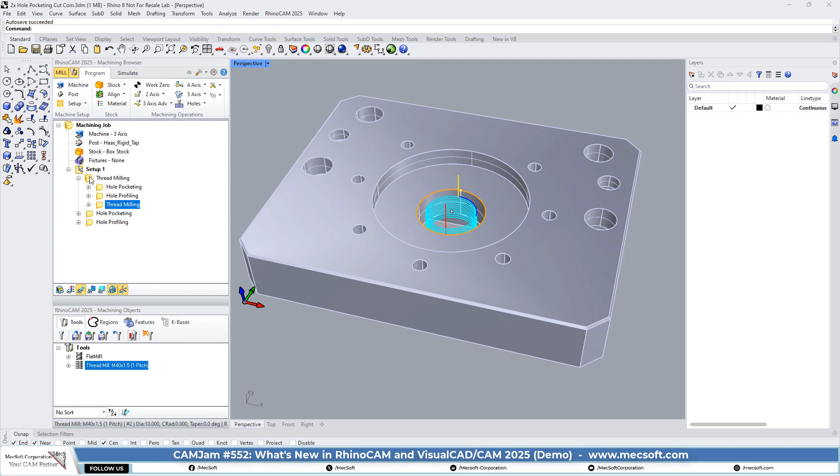So we've got a prismatic two-axis part. It's got a bunch of holes. One of the things we're going to show here is the enhancements in both the hole pocketing and the thread milling. In this part, we have an M40 metric thread that goes through the base of this part. Prior to starting that operation, we want to clear out and rough out the material, and get the inside diameter of that thread machined. So we need to do that ahead of time before we can do the thread milling.

So let's go look at hole pocketing. The first thing we're going to do is pocket out the hole and leave some allowance for the thread. So let's take a look at hole pocketing.

What we're going to do here is not select the whole perimeter, because that doesn't represent the exact inner diameter of the thread itself. So we're going to select a point, right in the center. So we'll go on to the tool, and we're just going to use a flat mill, 12 millimeter diameter, to hole pocket this out.

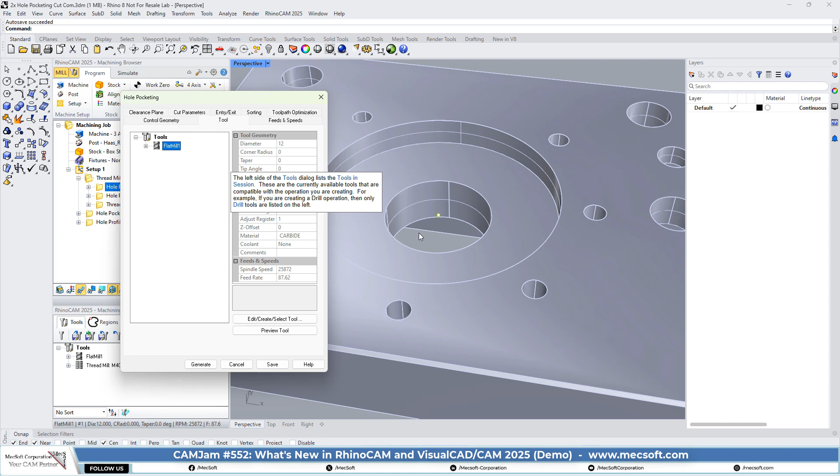For the cut parameters on the hole pocketing, the enhancement in version 2025 that we mentioned is compensation. So now you can apply cutter compensation, right or left, on hole pocketing. We've got compensation set to auto on, and we've got other cut parameters set.

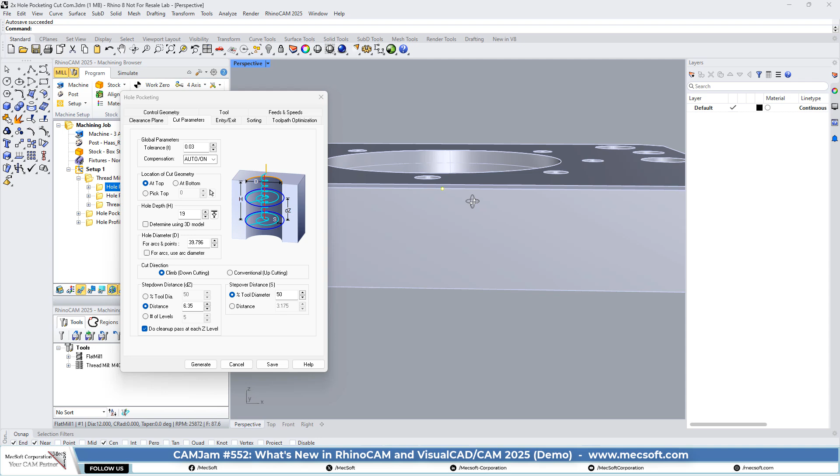A few things of note here: make sure you select the location of your cut geometry. In this case, we have selected a point, and that point lies at the top of the hole. It's not at the top of the part, as you can see, but it's at the top of the hole, and that is set to 'at top'.

We also have a hole depth that we calculated using the measuring tool, and we have a hole diameter. Here's where I mentioned that we didn't want to use the diameter of the hole as modeled, because we want to make sure we're cutting to the minor diameter of the thread, which will be smaller in diameter than the hole itself. So we calculated that it needed to be 39.796 in diameter - that's the minor diameter of the M40 metric thread we'll be thread milling in that hole.

One thing to note: you want to make sure you're using a point so you can specify the diameter. If you check this to use arcs for diameter instead, it'll just cut to the diameter of the hole itself, and that's not what we want.

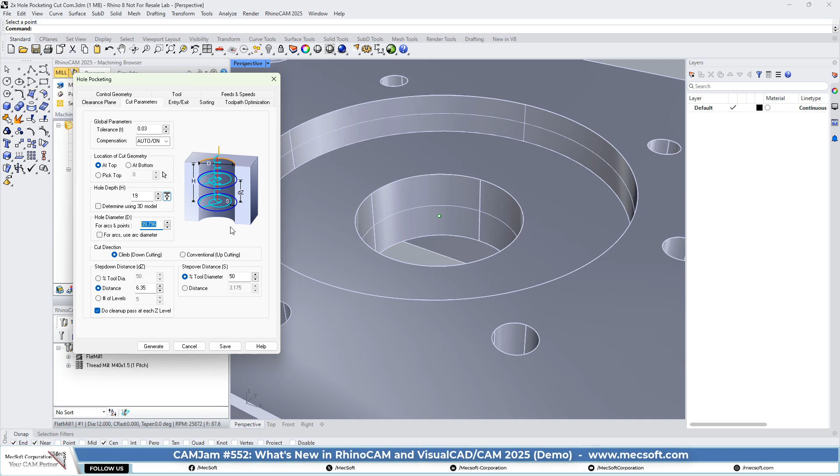So what else do we have on here? Everything is pretty straightforward. We're adding a cleanup pass at each Z level just to make sure we get as much accuracy as we can out of the hole pocketing. Now the diameter of the hole pocket is not going to be the finished diameter - we're going to come back with a hole profile. So we can go ahead and check that. It could be unchecked, but we'll leave it checked.

Entry and exit: typical for hole pocketing, we have a helical entry, so we get one helical entry at each cut level. It's going to helical down and do a cleanup pass at each level. We have a helix diameter of a quarter of an inch, or 6.35, and then a height H of 6.35.

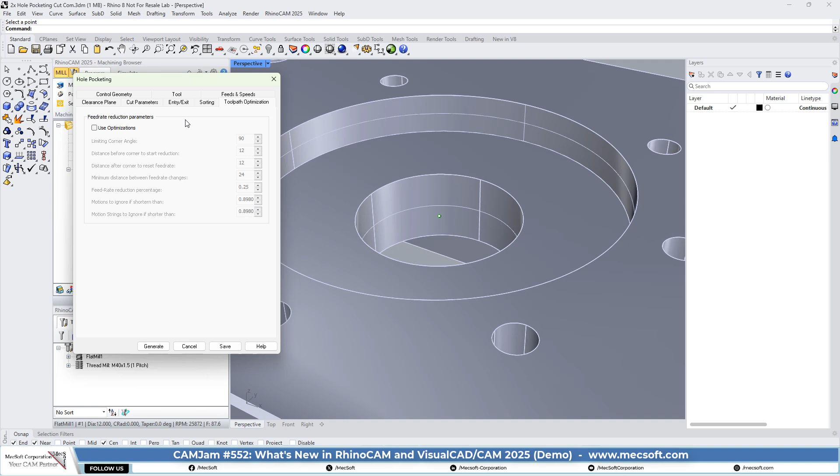Sorting - we're not going to do any sorting, since we're only cutting one hole. And also in 2025 we have feed rate optimization parameters, but we're not going to use those in this case. So let's just generate that.

So we have a hole pocket - one helical motion, and then a cleanup pass at each cut level. If you look at it from the front, you'll see we have a helical entry and then a cleanup pass. The blue motion is a cleanup pass at each cut level, and there are going to be three cut levels.

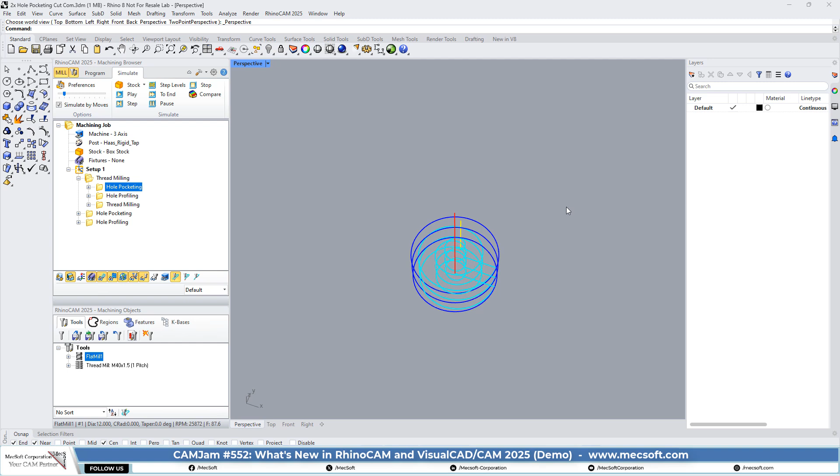So that is the hole pocket - basically a roughing operation for this M40 metric thread inside diameter. Based on that, let's go ahead and simulate it. Since we're here, let's turn the stock off. Now, since we haven't done any other roughing, you'll see this hole stick up a little bit higher. Let's go ahead and play that.

Okay, so we got the hole pocketing. Let's go ahead and look at the profiling.

In hole profiling, you have one helical motion to the full depth of the hole, and then a cleanup pass at the base of the hole. This cleanup pass is what really zeroes in the accuracy of the hole. Let's take a look at that.

We're using the same point, the same tool. In the cut parameters, we have compensation on again, and location of cut geometry similar to the pocket at top. The hole depth is the same at 19 millimeters.

And then also for the hole diameter, we're using 39.796. That is the minor diameter of the hole. And we're going to uncheck use arcs, and everything else looks okay.

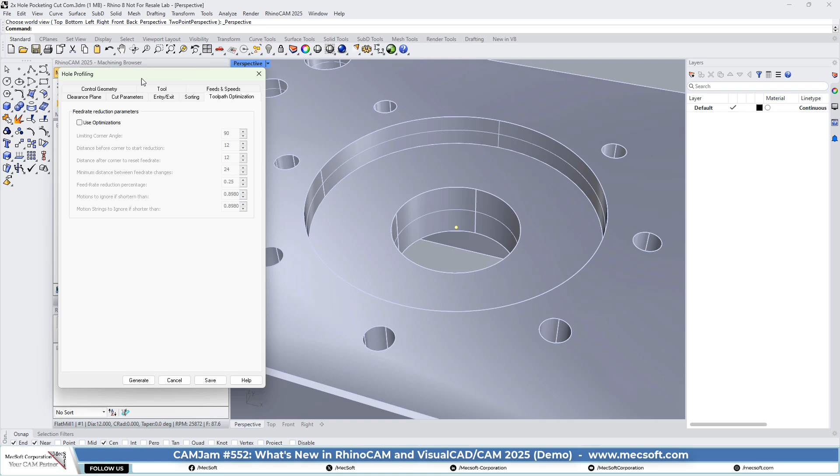Entry exit, we got lines and arcs, so we got a 1 millimeter entry, linear entry, and then also linear engagement, a linear retract. That all looks good. No sorting, no optimization. Let's go ahead and generate that.

So here is our hole profile, if you look at it here. This is the minor diameter of the thread, so keep that in mind. We're not cutting all the way to the hole.

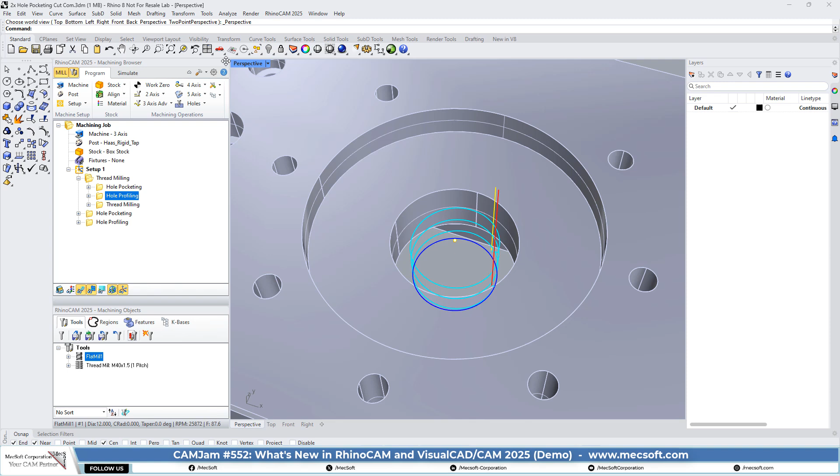Let's go ahead and show you what that looks like. If you look at this, this is the M40 hole here on each side, and this is the helical motion of the hole profiling operation. Then we have a cleanup pass, circular cleanup pass at the bottom. And again, we have cutter compensation enabled.

So now we've got this set up. Let's go up here to isometric view. Let's change this view. Okay, so now we have the hole prepared and it's ready for thread milling. Let's go into the thread milling operation.

So again, we're not going to use the point for the thread milling operation. We're going to use the circular diameter, because we're going to specify the parameters for the thread in the dialog. So this circular diameter is just more of a locator.

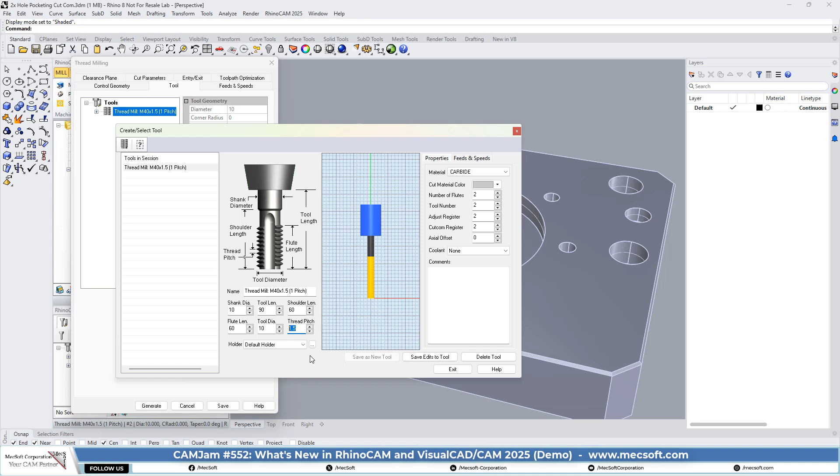So we're going to pick the tool, and as you can see, we have a tap tool. Let's take a look at that, or a thread tool. We have a thread mill tool, and what's critical here is the 1.5 millimeter pitch. This is the distance between thread to thread for the M40 metric internal thread diameter on this part.

So these other dimensions are not that critical, but obviously they've got to be smaller than 40 millimeters. You're using a single point tap tool, so this tool will only have one thread on it. It's not going to be threaded all the way down, so we'll just have one thread. The distance from the beginning to the end of that thread is the pitch of 1.5.

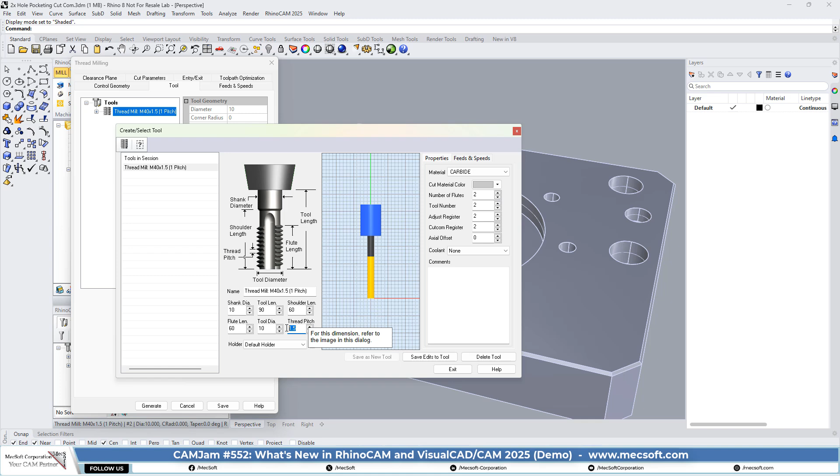So that's the major parameters that you need to make sure you got down correctly. The thread pitch is critical, so that has to be correct. Let's exit out of that. So we have our single thread tap tool specified.

Let's look at the cut parameters for thread milling. As I mentioned, the hole itself is just a locator because we're going to specify the diameters here. So we're doing an internal thread. It's going to be an M40 internal thread. We've got compensation on, cutter compensation turned on.

It's available in thread milling as well. So we've got a right-hand thread and an internal thread. The major minor, since we're doing an internal thread, it will be the minor diameter of the thread itself, and that's set to 39.796. And then a total thread length.

This is set to 18 millimeters, but I think that needs to be 19. Set that to 19. The start depth, this means where in this depth you want to start cutting the thread. We want the thread to go all the way through from top to bottom, so the start depth is set to 0.

And for the pitch control, we're setting it to a pitch at 1.5 millimeters. That is critical. That has to match the tap tool that you're using. And in 2025, we added some additional parameters. You can specify the pitch by threads per inch if you want to use that value.

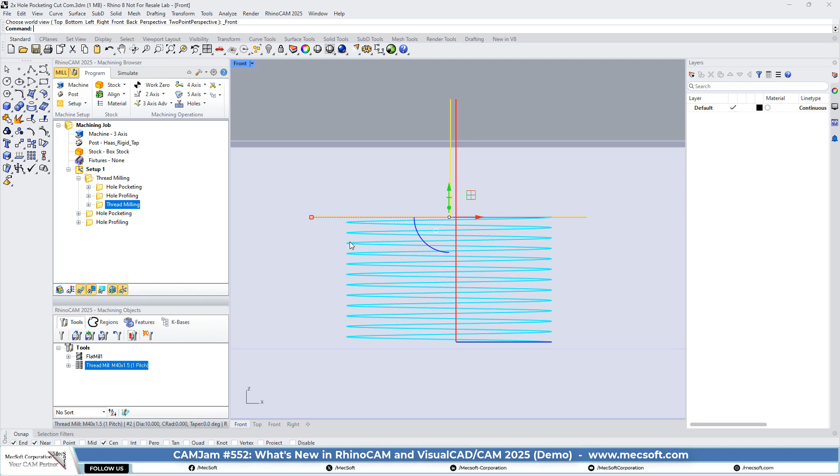As you can see, you don't actually see the thread—we don't simulate the actual shape of the thread, but the control geometry is there to create it. It's one helical motion at the thread diameter, with a helical ramp entry to the start of the thread, cutting at a pitch of 1.5 millimeters from top to bottom. So let's take a look at what this looks like when we post it out.

Let's go ahead and look at the post for a moment. Okay, let's see what else we got. We got a couple of posts here—Haas CutCom, let's go ahead and select that, and we'll pick OK.

When you run this on the machine, this big hole here at the top is all going to be cut out already, so we're just looking at the operations needed to do the hole pocketing and the thread milling. So let's do the hole pocket. Let's go ahead and post that.

So what we got here is the hole pocket, and we have a G40, which is turning off the cutter comp. Then we got a G41, which turns on the cutter comp for that dimension, and that continues on down for the entire pocket. It should turn it off at the bottom. So we got cutter comp in the hole pocketing.

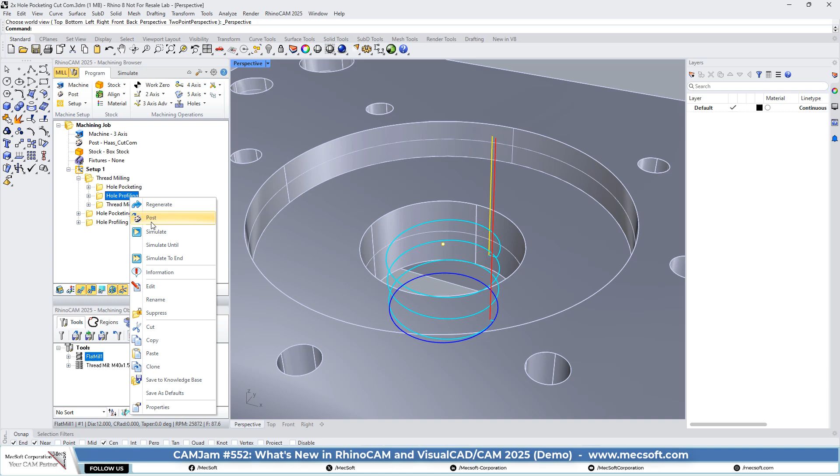Let's go ahead and look at the hole profile. Post that. Okay, very similar—we've got a G40 to turn off cutter compensation at the start, and then we're doing a G41, turning on the cutter comp for the perimeter diameter of this hole.

This blue motion here at the bottom, that's the full cleanup pass. That's going to be assigned to the G41 where you can offset it at the controller.

Now, just a note about cutter compensation. If you're not familiar with what it does, there are some misconceptions out there that it's only for compensating for tool wear. Yes, you can compensate for tool wear, but that's only going to come into play if you're doing production parts. If you're running 100 parts an hour, you're obviously going to have a lot of tool wear, and every time you do your dimensional check, say every 50 or 100 parts, you can make those adjustments on the controller using the cutter compensation offsets for each of the tools. That's one of the ways it's used in production.

But in most cases, our users are not running production—well, they do in some cases, but a lot don't. So what would you use cutter compensation for if you're not running production? Well, think of it this way: any operation you cut, you're going to have a setup, you're going to have stock, and you're going to have a tool, and you're going to run it. The very first time you run it, it may not be exactly positioned correctly, depending on the geometry, depending on the cut, what you're doing.

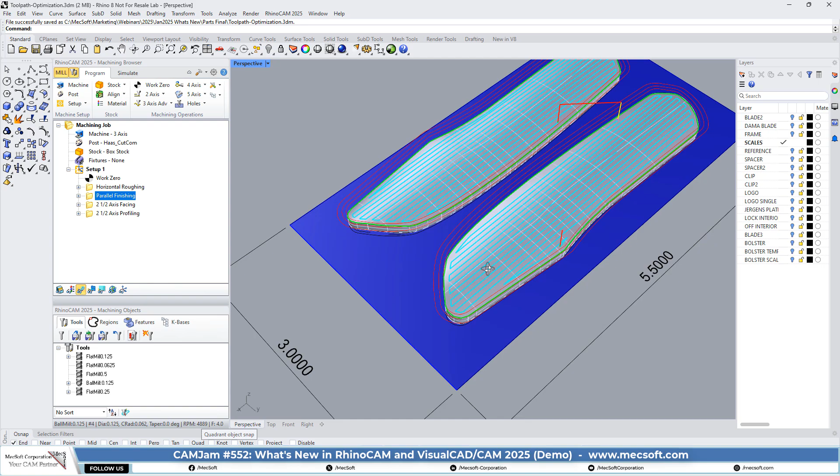By leveling, I mean not just 2 1/2 axis facing, pocketing, profiling, etc., but also in horizontal roughing, where you have flat cut levels, and any other operation type that creates a flat planar area. Okay, so in this particular part, we have a couple of parts and they sit on top of a plane that we're going to use to machine them.

So let's look at what we have here. We have horizontal roughing. Let's take a look at that. Okay, we got no control geometry selected, so it's just calculating what it can remove. We got a quarter-inch flat mill, cut parameters. These are all straightforward. You'll be familiar with all of these. Let's go ahead and look at the cut levels. So here, pretty much standard.

We have an extra button here called Add Stock. I'm going to go over that in another part in just a moment. And then also engage and retract. We're using a helical engagement. We're doing some arc fitting.

Toolpath optimization. So here, if you're familiar with our feed rate optimization in version 2024 and prior, you may know that feed rate optimization was an edit that we did after the fact. So you could only do it in a toolpath. Let's save this. I'll show you. You could only do it in the toolpath editor, okay?

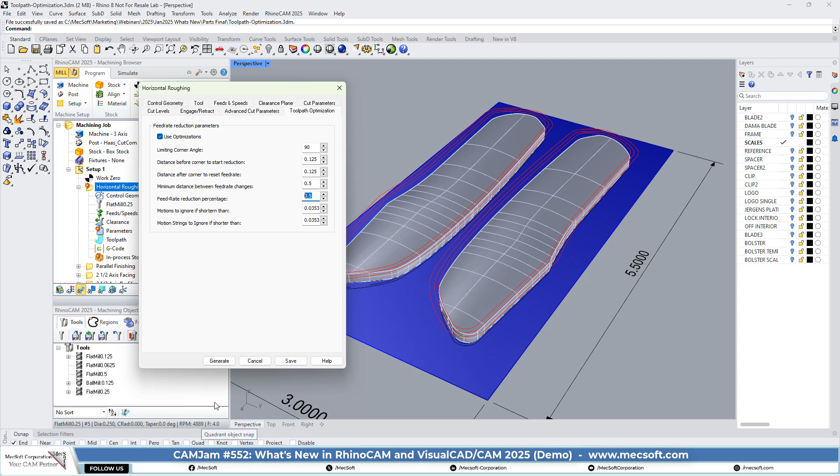So let's go ahead and regenerate this, okay? And let's go ahead and look at what the feed rates are. So we have a cut feed rate of 4 inches per minute.

Now, in version 2024, that would be the cut feed rate throughout the whole path. It would not change. Come to a corner, your router will have to come to a complete stop and then start and stop, start and stop, and you actually can see that jerking motion on your router if you have a lot of sharp angles in your toolpath. Now we have other things you can do, such as some looping and stuff like that, which helps also. But now you can actually control the feed rates at those corners.

So toolpath optimization, it's enabled, okay? And the feed rate is set to 4 inches per minute. Okay, so let's generate that. Let's see what our post is set to. Our post is set to Haas CutCom. I think that should be all right. Let's go ahead and pick OK there, and let's post this and see what we got.

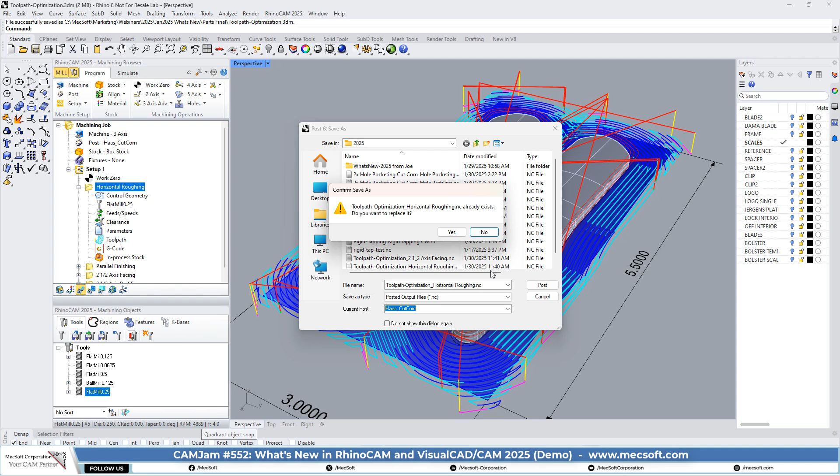Okay, so let's look at this. So our feed rate optimization was enabled. The feed rate was 4 inches per minute. At the corners, we have a lot of corners, so at the corners, it should drop by 50%. So what you're seeing here is we got a feed rate of 4. It's dropping to 2, 50%. All the way through here, it's dropping 50% at corners. Anytime where you see an F2 is where it's dropped from an F4 to an F2. So this is feed rate optimization in action, and how it looks in your G code itself.

If you don't see the reduced feed rate in your posted G code, you need to make sure that you have it enabled in the operation dialog, which is called toolpath optimization. Make sure that is enabled, and make sure you have the parameters set the way you want them to be set. Okay, let's cancel out of that. Let's see what else we have up here. So that was horizontal roughing.

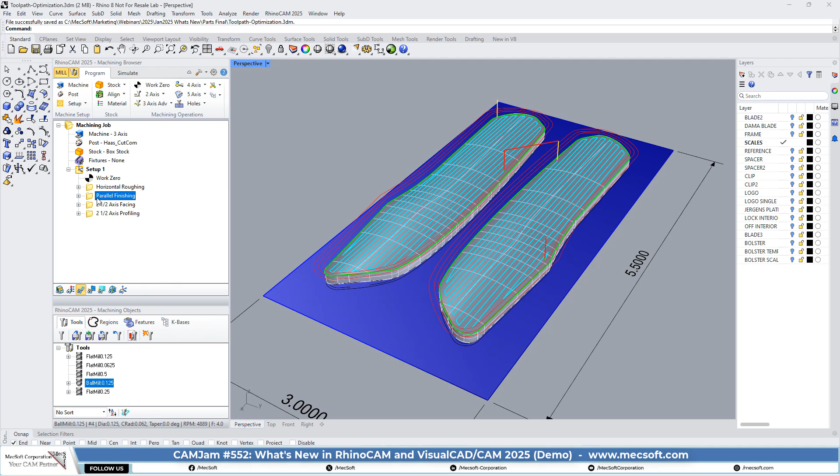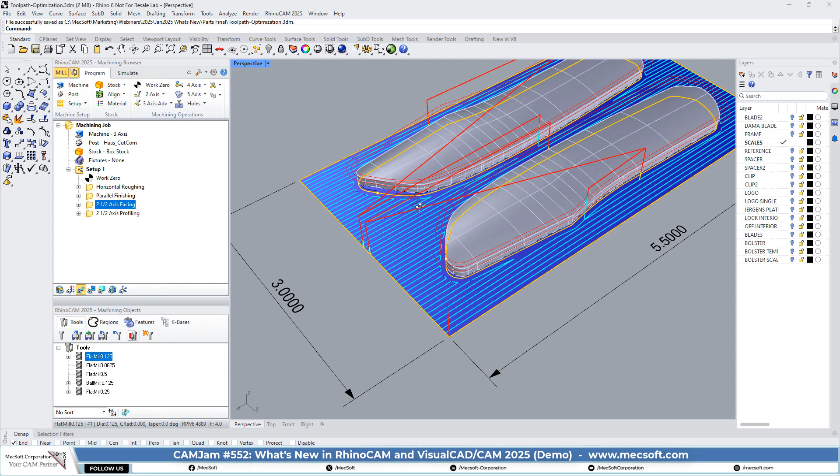It also will not apply to horizontal finishing that's not planar. So we have a contoured parallel finishing. It will not apply to that situation. But if we go on down to the facing, this is a planar toolpath with a lot of sharp corners that will apply there. So let's take a look at the facing.

So we have use optimizations enabled, and we have the feed rate reduction percentage set to 25%. Let's take a look at what we have for feed rate. So we have the cut feed rate at 10. So this is 10 inches per minute. At the corners, it should drop to 2.5 inches per minute. It should be 1/8 of an inch prior and 1/8 of an inch after each corner. Okay, so let's generate that again. Let's post that.

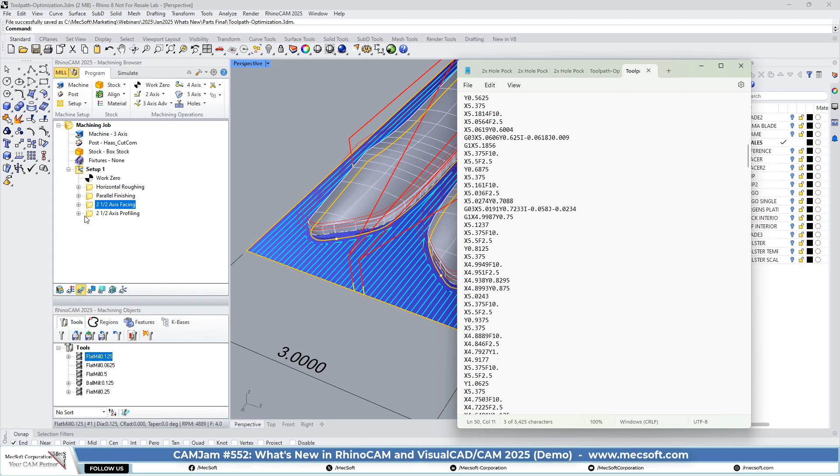So here you'll see that we have a feed rate of 10, and at every corner it's dropping to 2.5. So all throughout the whole part, you'll see it drop to 2.5 at each corner. At the beginning, it'll drop, and then after it turns the corner, it will speed up to 100%. So that's feed rate optimization in action in 2 1/2 axis facing. Let's go ahead and minimize that. Let's take a look at the profiling.

So your feed rate optimization, well, we do have it in there. You can apply it to profiling as well. Okay, so that is 3-axis feed rate optimization. Let's take a look at our next 3-axis part, which is, let's take a look at this one here, which is faceting controls.

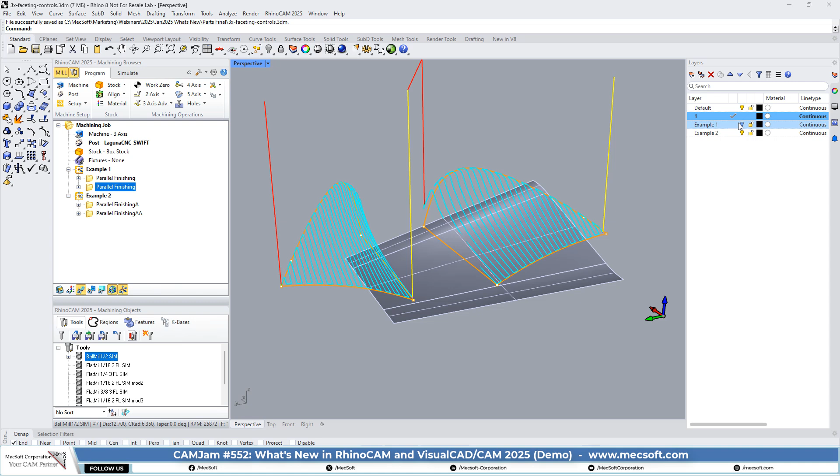Now, you may have noticed, and this is only in certain surface cases, such as ruled surfaces. Let's turn our surfaces on. We got 2 examples here. Let's turn that off. Okay, so the problem applies when you have a ruled surface. A ruled surface is one that is a direct connection between one curve and another curve. So it's like a ruler. It's like you put a ruler on each of those curves, and you just run the ruler down as it stays on both curves, all the way to the end.

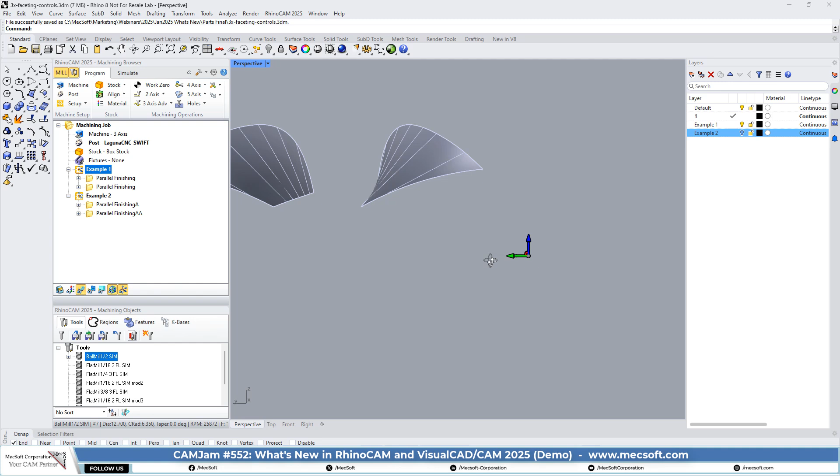So as you can see, any cross section in this surface is a straight line, but it's a twisted ruled surface, which is a very complex surface. And in some cases, the actual internal generation of the coordinates and the facet points on that surface can get skewed. This is a problem that we've been working on and fixed in version 2025, and a lot of users out there, if you're one of them, you'll be very glad to see this. So how do you implement this? If you go to the CAM Preferences dialog, go to the Machining tab, you'll see Meshing Parameters, okay?

So what it's doing is it's using these parameters here internally to calculate each control point on the surface that we're going to use to actually generate the tool path. So our part is in millimeters. We have an aspect ratio, which is the relation between the length and the width of each facet in a mesh. If you're familiar with mesh geometry, you know that a mesh is a collection of planar triangles that define the entire object.

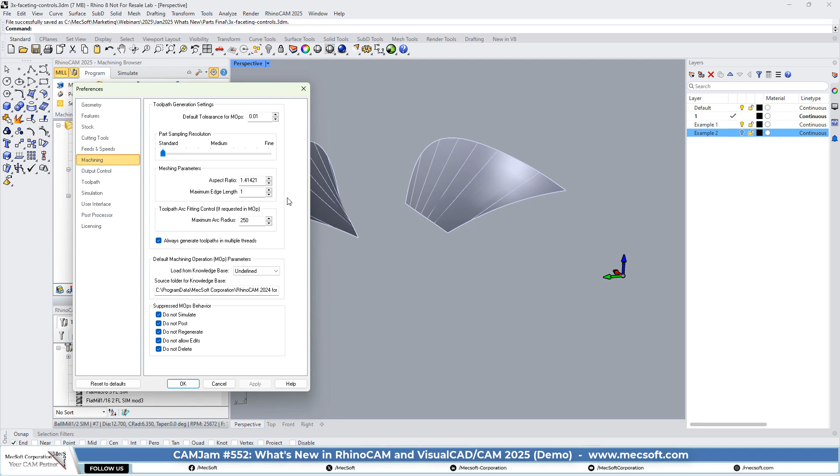So we're setting the aspect ratio to 1.41. That's the relationship: length divided by width is the ratio. And then we're also setting the maximum edge length. In this case, we're setting it to 1 millimeter. So let's go pick OK there.

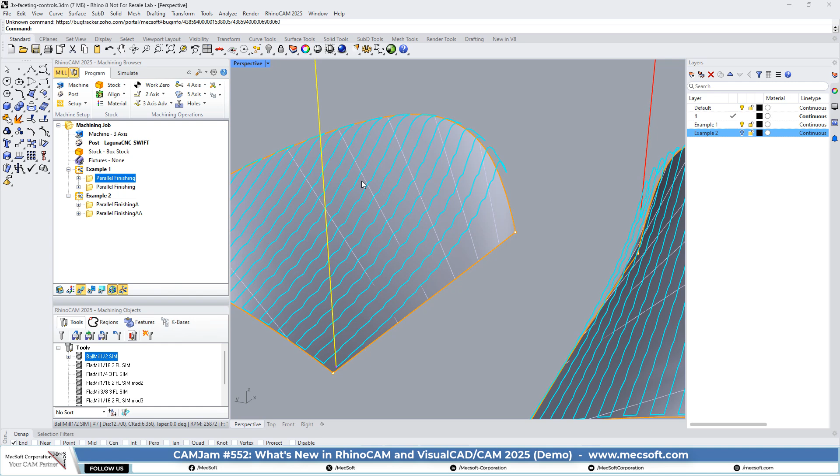So if we look at the parallel finishing before we set the meshing parameters, you'll see that there's a lot of jagged lines in that tool path as that tool rides over that ruled surface. This is bad, so you're not going to want to cut it like that. So what we've done is we've implemented the meshing parameters; once you set those and you just go back in and regenerate the operation, you'll see that it's cleaned up for you.

Nothing else you need to do. You don't need to create a mesh in Rhino or in Visual CAD. You don't need to create a mesh to try to fix those errors in the toolpath. That's all fixed in version 2025. And we have another example.

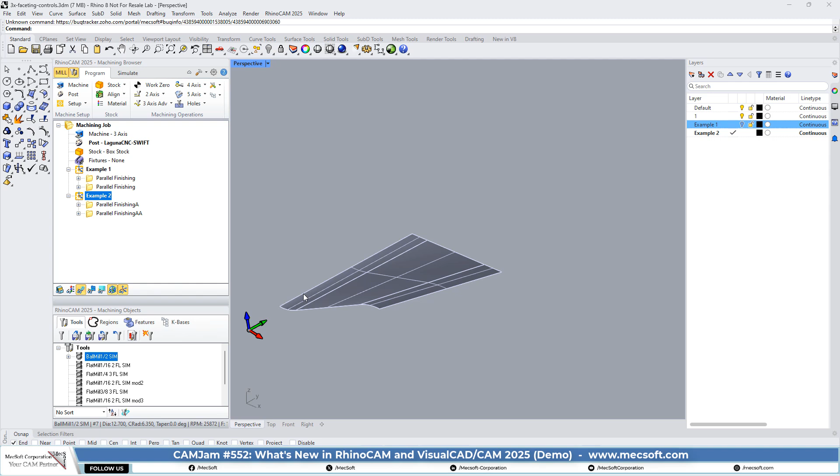So here is a ruled surface. It's not as extreme as the other one, but it is relatively complex. We don't have a straight line here. We have a curve on this end with a straight line on this end, which causes the ruled surface to twist around. So let's take a look and see if we can see the problem.

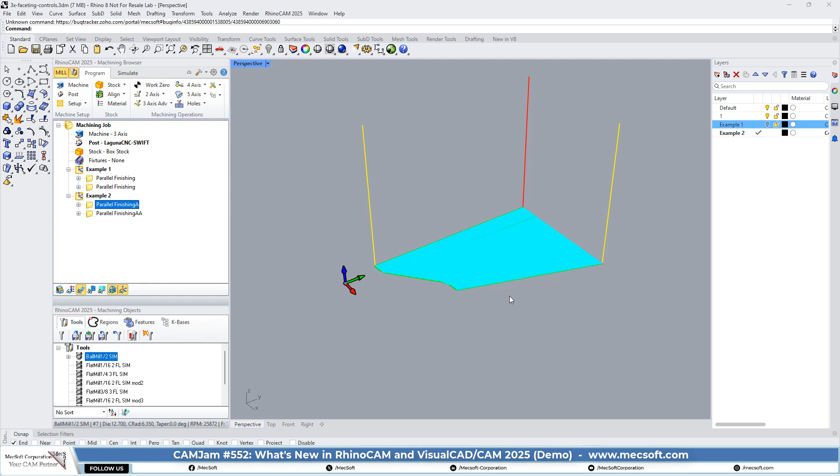So here's our toolpath. In order to see this, sometimes you need to have a really dense step over in order to see the phenomenon we're looking at. So you can start to see it. Let's go into the Simulate tab. Okay, so the part is turned off.

So what you're seeing here, you're seeing those facets. That's a good way to get it right there. You see those rectangular areas in the part or in the toolpath itself? So that will be seen when you machine this on the router.

So now if you set the meshing parameters here, again, you set it over here, machining, meshing parameters, and we generate the toolpath. We added a second toolpath. You'll see that those faceting phenomena are gone, so you will not see those in the machined surface. Very, very sought after fix, enhancement, whatever you want to call it. This should not happen now in version 2025.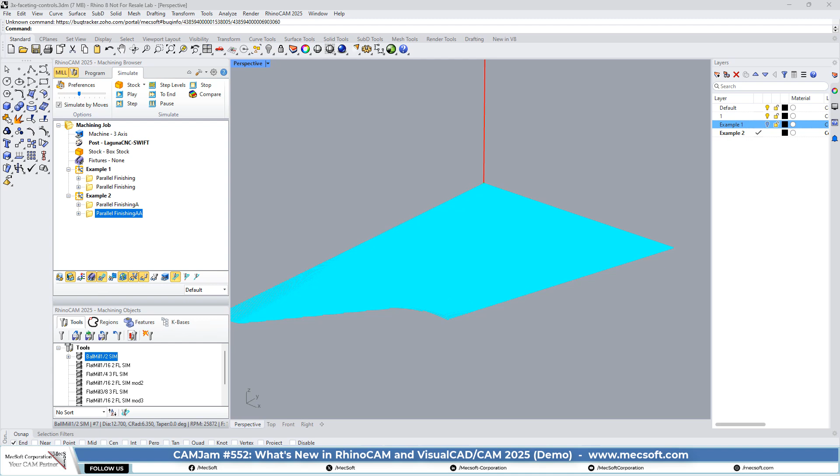Okay, let's keep going to some additional 3-axis enhancements. Let's get my cursor back here. We're going to look at this one here. Now in 3-axis operations, for your control geometry, you can combine both surfaces and curves, and they act in a nesting type relationship.

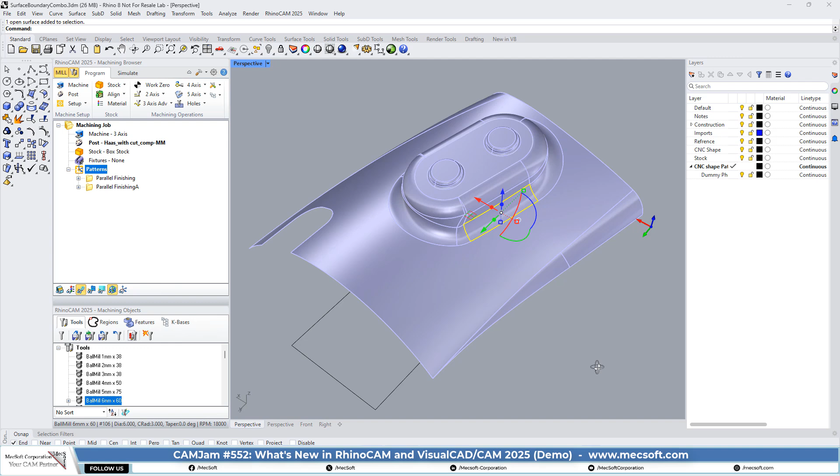So in this particular example, we have a surface. This is our base surface. And then we have a feature on top of that surface that rolls up off of that surface. Now, to cut this, you may not want to cut this feature as part of the surface. You may want to just do the surface first. So in cases like this, you can now select both the surfaces and the curves in order to get a nested effect.

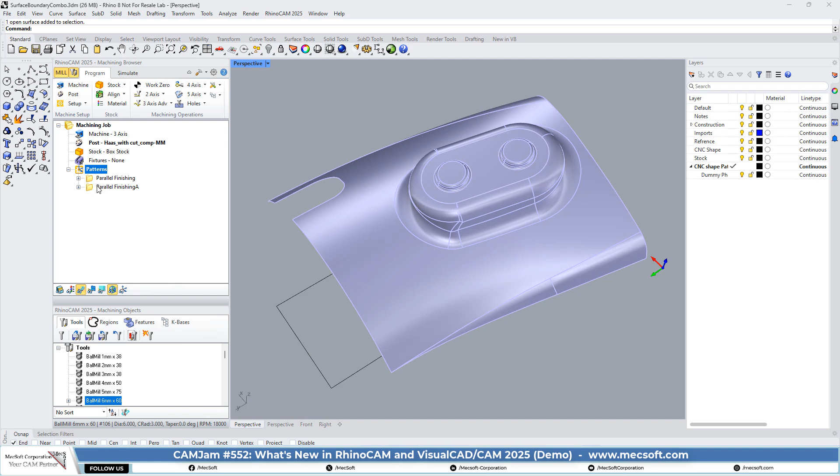So let's look at the parallel finishing operation. In this particular example, we have a part surface selected on the surfaces, part surfaces tab. So this is the green edges here. That's our base surface. And then for containment regions, we're selecting these perimeter curves all the way around the base of this feature.

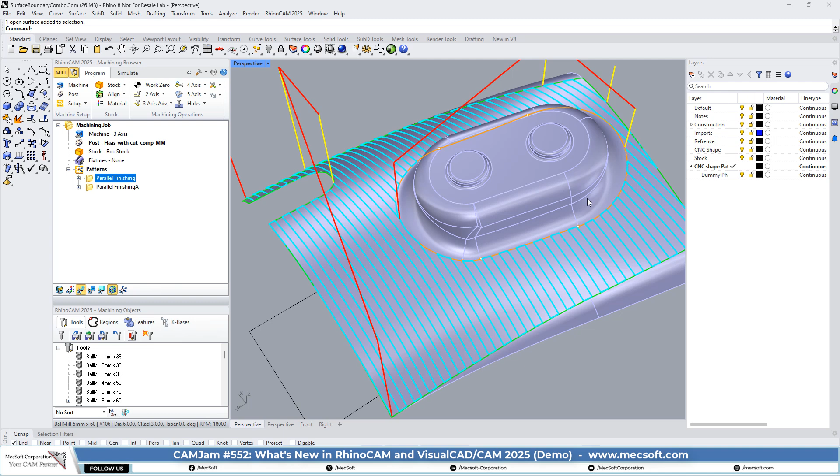So what happens now when you generate that, the inner curves will serve as a void region. So the tool will not violate these inner curves. I know you may be wondering, well, these curves are completely inside the surface. What happens if they don't? What happens if they fall off of the surface? So we'll get another example here.

If you look at the top view, and let's go into a wireframe for now. So we've got the surface and we've got a planar rectangle here that is partly on and partly off the surface. Let's take a look at how that looks here.

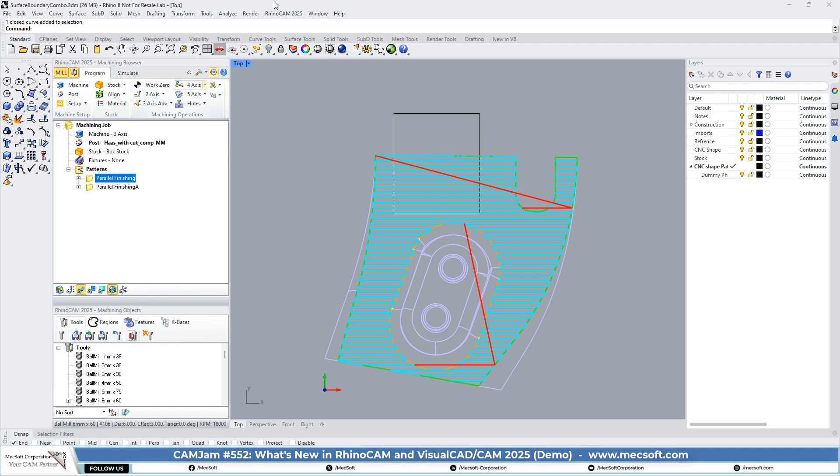Let's turn the surfaces back on. Okay, let's just take a look at it. As you can see, it creates a void region where the curve geometry intersects with the surface geometry. It treats that as a void region.

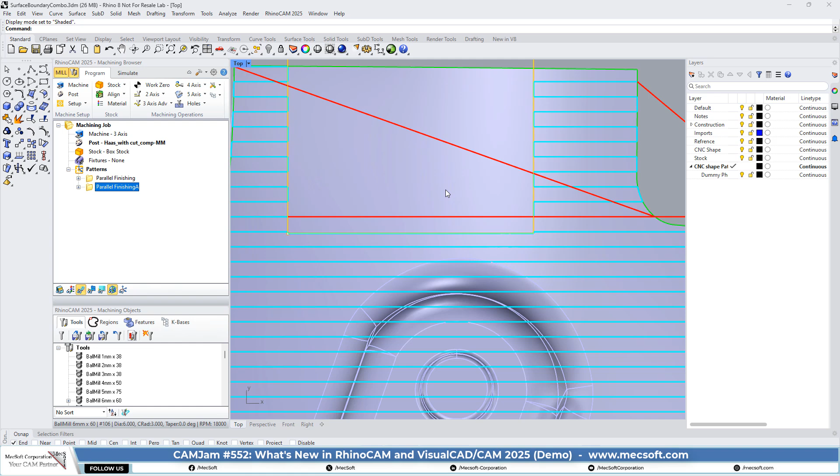Okay, so think of it as having void regions in 3-axis, where prior versions of void regions basically applied to 2-axis, but you could do it in 3-axis if you selected the curves in a certain way, like edge curves of the surface and edge curves in here. It will figure out that some of these curves are inside the other curves, but it's more of a complex situation. You could run into some conditions where it could be a problem, okay?

So now you can use both surfaces and curves together to generate your toolpath in 3-axis methods. And in a lot of these 3-axis methods you will see that you can put both containment regions and part surfaces in the same operation. Okay.

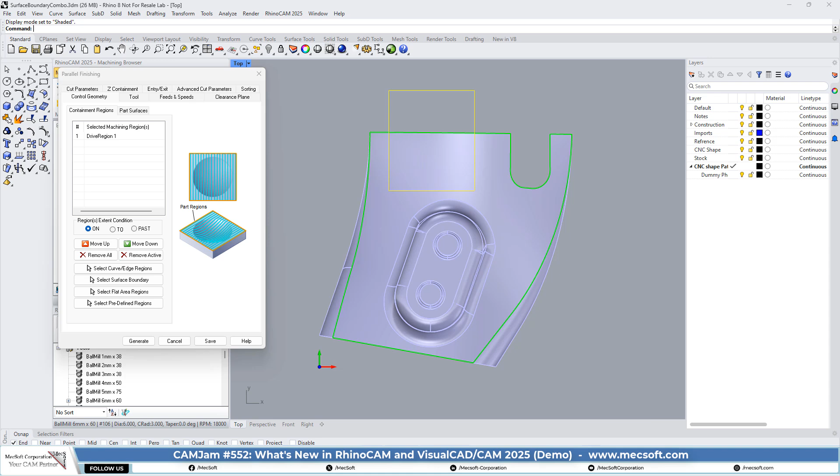Okay, let's look up one part that I wanted to show you. I'm going to show you a couple of things on this part. Where is that? Right here. One of the things is an enhancement that we made to our professional configuration in relation to corner loops in 3-axis projection pocketing. Now, 3-axis projection pocketing, you'll see on the 3-axis advanced menu, is projection pocketing.

Okay, in projection pocketing, what happens is the toolpath is calculated on a plane internally, and then those toolpaths are projected down in the z-axis onto the part. So the resulting toolpaths are 3-dimensional. They're not planar toolpaths. They're on the part surface. Okay, so that's just a quick definition of projection pocketing.

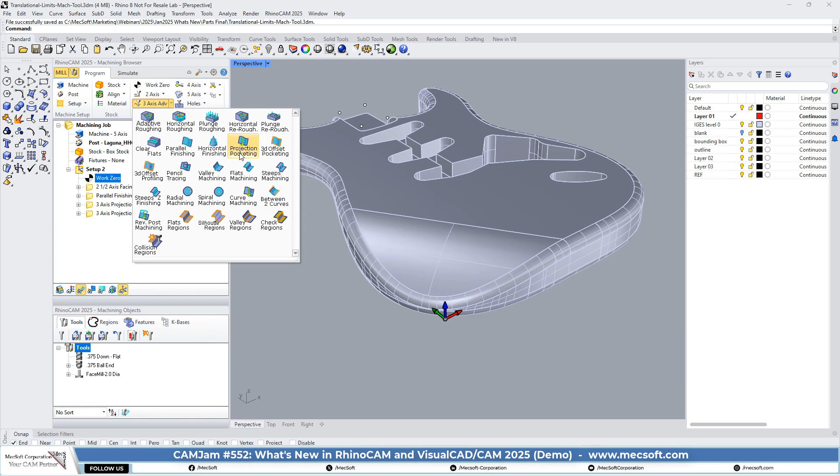So let's take a look at what we got here. Prior to 2025, in projection pocketing, let's take a look at that. We have a surface selected. We have our ball mill tool. Okay, and prior to that, you didn't have the cleanup loop. So this is what's new right here. You have corner cleanup loops: none, inside and outside. So prior to 2025, there wasn't any, so I have it set to none.

So what you get is these very sharp angles from one direction to another. Just as it can be a problem in 2-axis planar toolpaths where the router has to stop and start at each corner, it has to do that also on 3-axis parts. So what we've done here, instead of implementing feed rate optimization, which I think there is in it, let's take a look. No. So there is no three-axis feed rate optimization, but what we've added is the ability to add loops at these corners. Let's take a look at what that looks like.

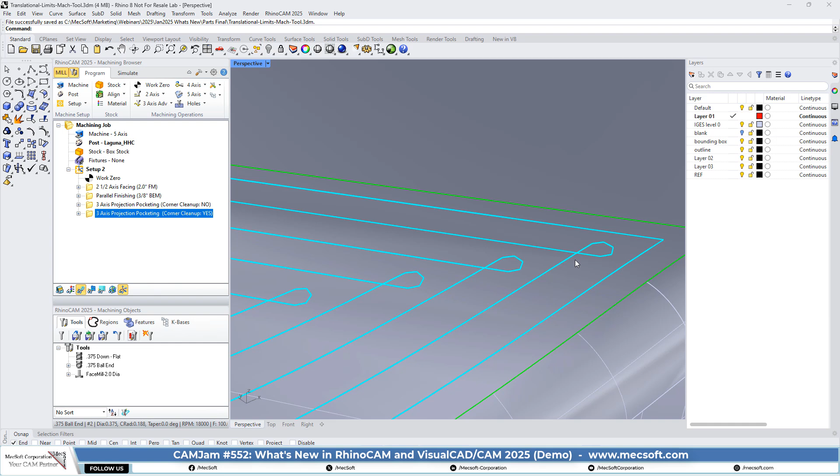So on this one we have it set to corner cleanup loops outside. So this is the effect that you get. In effect, what it's creating is a high-speed toolpath in three-axis, where the tool, instead of just stopping and starting, can continue past, do this loop, and go around. So each one of these angles here is greater than 90 degrees, so it's a lot easier on your router, and also on the cutting tools.

And you get a better surface finish, because if you don't have these loops, you'll have some material that may be cusping and left on the part in these particular areas, where you'd have to go in and manually clean that up with an emery board or sandpaper if it's wood in this case. But the loops help get rid of that excess material, for a better surface finish, less wear on your tool, and less wear on your CNC router. So that's three-axis projection pocketing in the professional configuration.

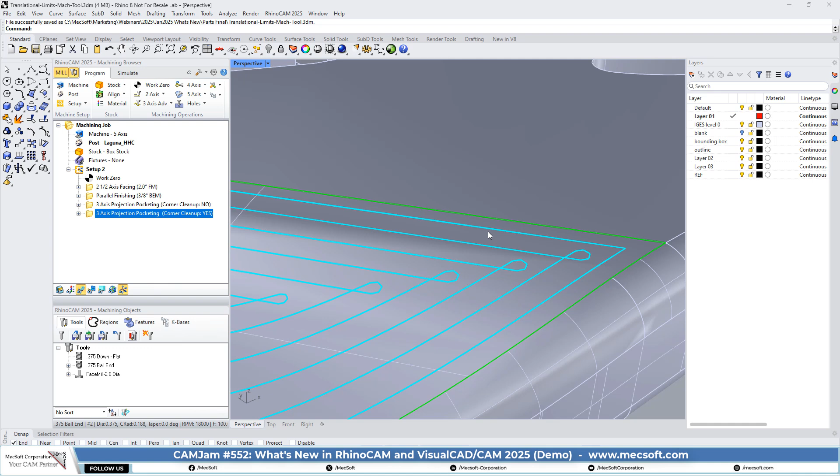Okay, so what do we got next? There was one other thing I wanted to show you while we had this part displayed. So you've got your part set up. Okay, let's go back over here. Let's turn on the world coordinate system. So we've got a world coordinate system, and we have a work zero up here, which appears to be at the corner of the stock.

Okay, yes. So we got our work zero, we got our stock, everything looks good, okay? So you run this on the machine, and then you get an error on your controller that says machine limits exceeded in X or Y. In this case, it's X, okay? So then you're scratching your head, and you went, okay, so how do I move my part to make sure it's inside my machine limits?

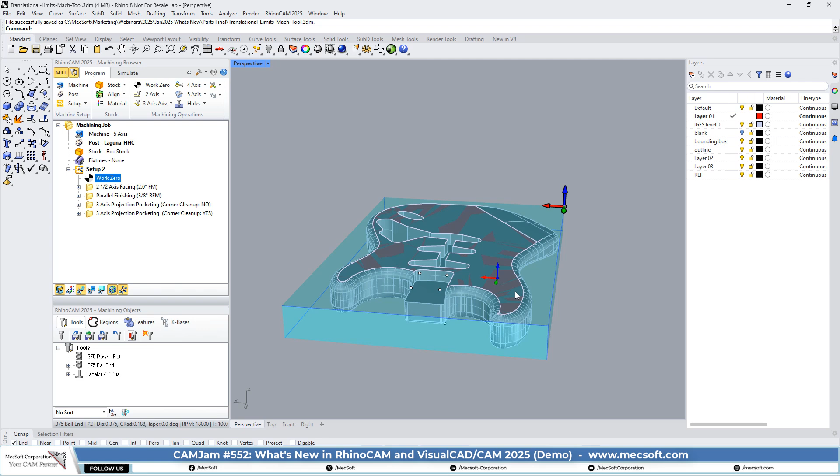And we actually get a lot of support emails on this. So what we've done in 2025 is we've given you the ability to see your machining envelope on the screen. So if you go up to the machine definition dialog and you set your min-max translational limits of your router, and these are values that you will find in your router manual. If you can't find it, just contact your router manufacturer and they'll supply those values for you.

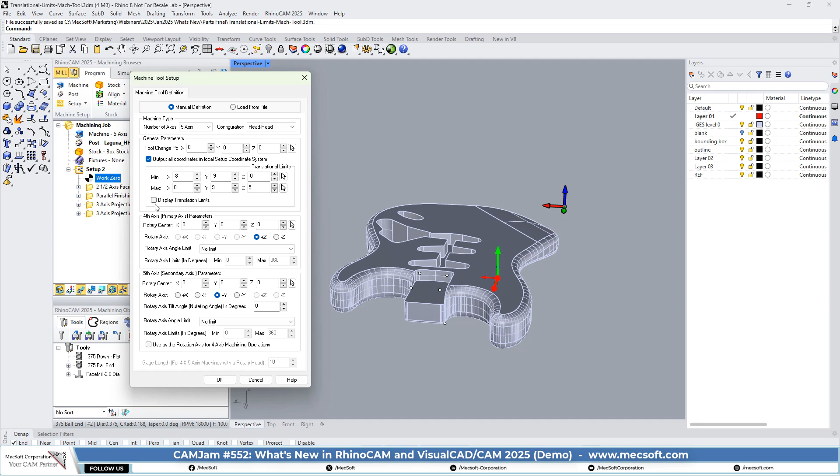Just enter those values here, check this box, this is new, Display Translation Limits, and you'll see that the limits display on the screen similar to a stock model. But let's look at what's going on here. We see that the part is too far outside the machine limits. So every toolpath on this part that exceeds past these translational limits in our plugin will flag as an error and alert you when you simulate that toolpath.

If any part of a toolpath simulates and goes outside of this limit, then it will flag you and let you know before you get to the router and before your controller throws the error and you've got a part half machined and you're wondering what's going on.

Okay, so this is a good thing to look at on every single part. Make sure your translational limits of the machine are set in the machine tool setup dialog, and check this box, and you can visually see your translational limits as they relate to your part and your setup. A very, very useful enhancement for 2025. Okay, let's move on.

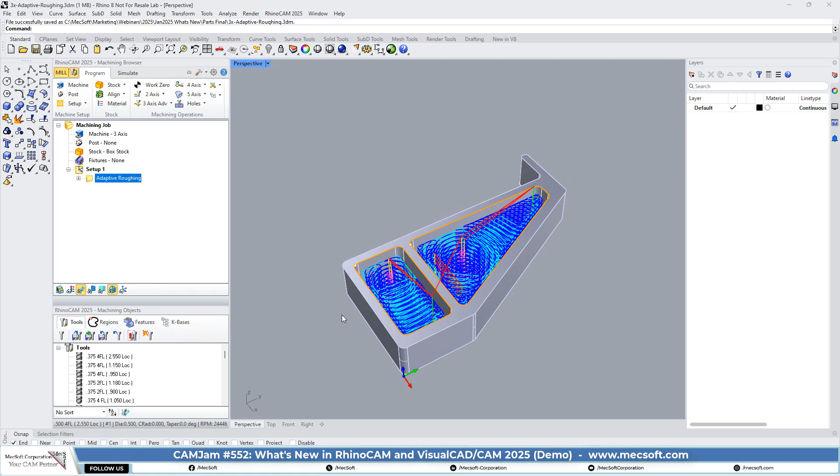Our next enhancement in 3-axis is in adaptive roughing. Let's go ahead and look at that. Here we go. So we have a part here that we want to rough out these inner chambers using 3-axis adaptive roughing. Now, adaptive roughing is located here on the advanced 3-axis menu. If you do not see adaptive roughing on your menu, it means that you have not purchased adaptive roughing.

Adaptive roughing is, as we mentioned here in the video, a module, sort of like a mini module. It's a technology that you can add to any existing configuration. And adaptive roughing in and of itself is a method that, during the computation and calculation of the toolpath, does a lot of adjustments based on your geometry, your tool and your toolpath parameters to get a very optimized high-speed toolpath.

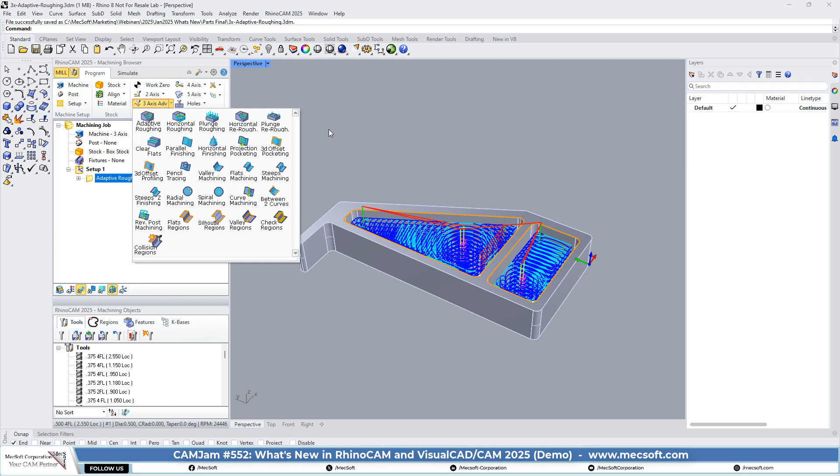Now, what have we done? We've had adaptive roughing already in prior versions, but in this particular 2025 version we made a few tweaks and enhancements to it that I want to show you. So let's look at the adaptive roughing dialog. We're using a 1/2-inch flat end mill. The cut parameters, everything looks pretty straightforward there.

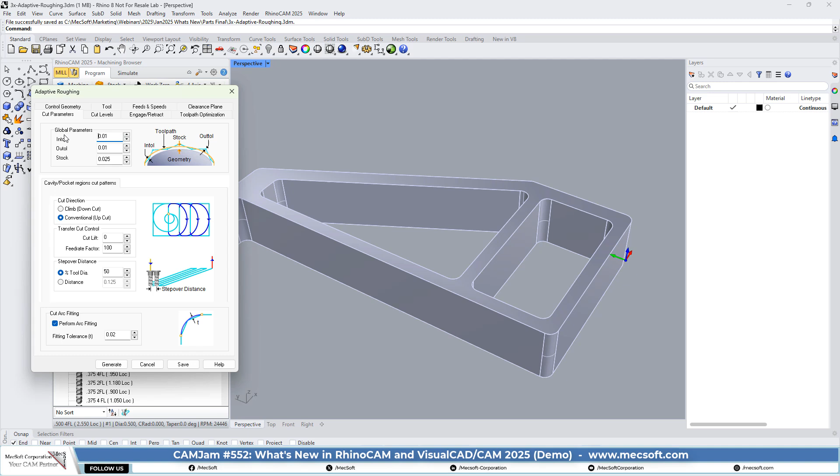What we've done is in the engage and retract area where you assign the values for your helical entry. In adaptive roughing, everything is about not slowing your tool down. We don't want to make your tool stop and change directions. We don't want it to stop at all. So in most cases at each cut level, you'll see one helical entry and one exit.

You may see areas where the tool may have to rise and transfer to get down to another area, but even in those areas, we add arc motions to facilitate the high-speed cut pattern. So if you look at the entry, engage, retract, and material parameters, there's our helical motion, and you can also apply toolpath optimization if you want. But this is a method that cuts in levels. It's a roughing method. So let's take a look at the view toolpath in levels display.

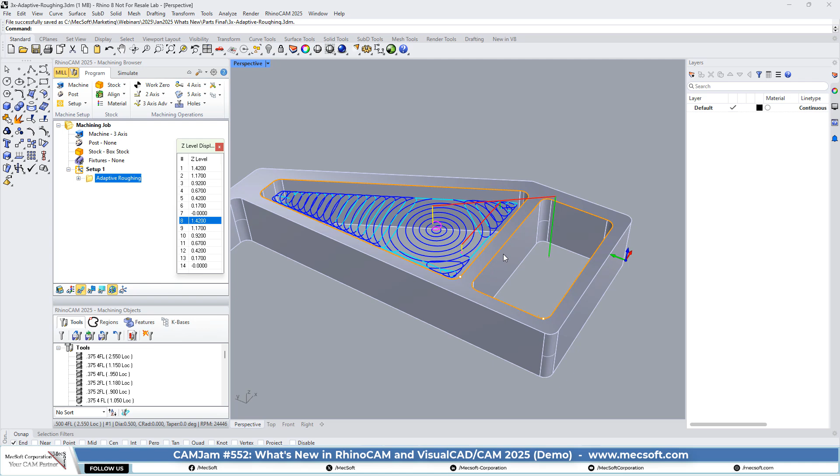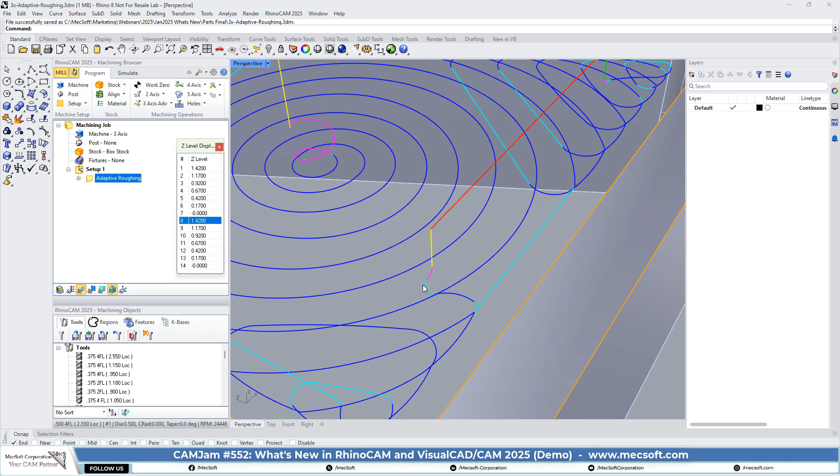So we've got each one of these levels. Let's look at the first level here. As you can see, we have our helical entry, one helical entry at each level, but you'll also notice that we have a retract and a transfer to pick up some more material over here. In the retract, we have an arc motion and an arc motion and a retract motion. These arc motions facilitate the high-speed cut pattern itself at higher feed rates. And then we also have arcs on the re-entry over here.

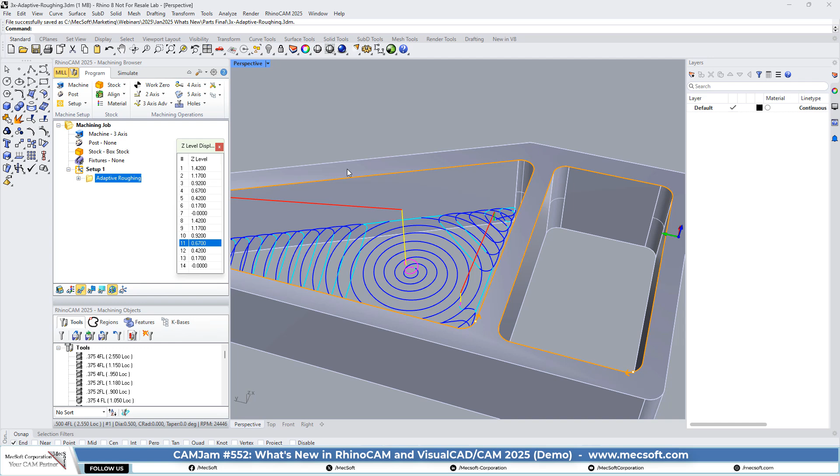So the enhancement is that we now enforce the helical entry at each cut level regardless of the depth of the cut level. In prior versions, the depth of the cut level may not have allowed us to put a full helical motion, or for whatever reason, it may have skipped the helical entry and just plunged down to the entry point. Now we do not do that. We force a helical entry at every cut level, and we also add arc motions if you need to retract and move the tool to another location. So that's primarily the enhancement we did in 3-axis adaptive roughing. Okay.

Okay, we got one more enhancement that I want to show you in 3-axis. Let's go over here. Let's turn the toolpath off.

So you may have seen this part before. We've used it for a number of different things. But with the enhancement that we did in 2025, you'll notice that this part has flat areas. We got a flat here, 4 flats up there, we got a flat in the center, we got a flat right here.

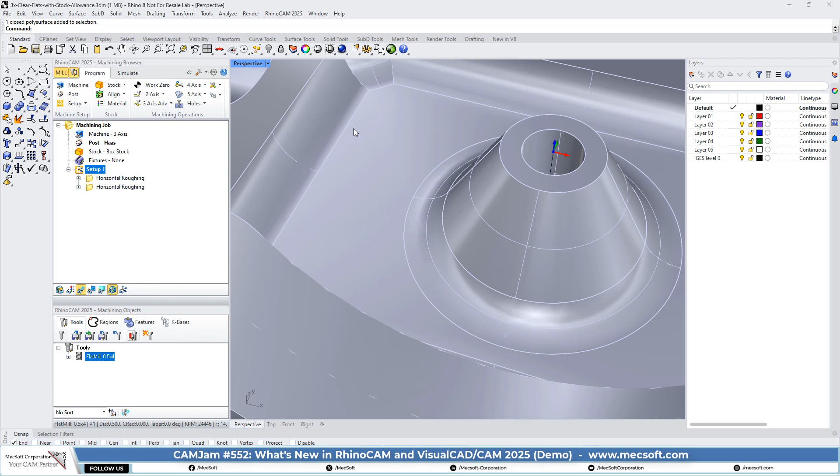We've got a flat floor inside. So if you're familiar with horizontal roughing, you know that you can clear flat areas automatically with the toolpath. So let's go ahead and look at the horizontal roughing. Look at the cut levels tab.

So what we've added is this checkbox to add stock. By adding stock, what that means is users, a lot of you have asked for the ability - I don't want to clear the flat. I don't want to cut all the way down to the flat because I have a stock set to 25 thousandths. I want that stock to apply to the clear flat area. I don't want it to cut all the way down. I want to clear those flats myself with a separate operation. I have better control of it with a newer tool, say, to get an exact better either surface finish or an exact better positioning of the flat, etc.

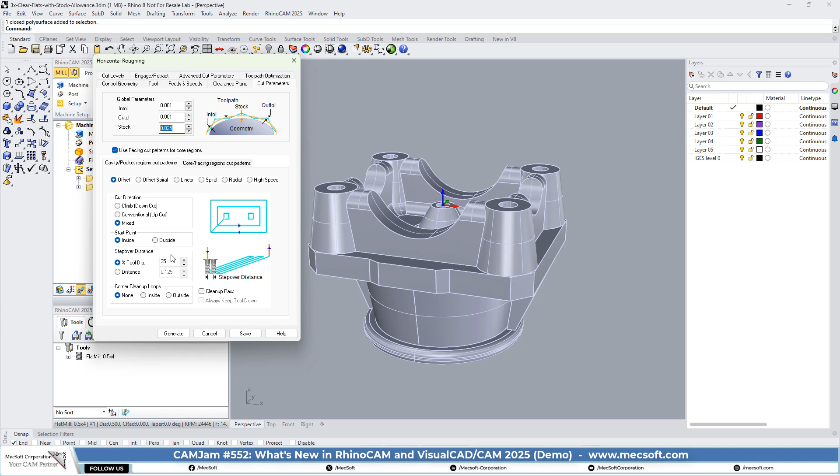So now what you can do is you can add the stock back to the flat area. So let's take a look at what this looks like. Let's go to the multi-view port.

So we have clear flats enabled. We don't have stock enabled. So this is what it was like in 2024 and prior. And what you got was an additional toolpath at each flat area. So you have one there, you've got one down here, you've got one here. So it just interjects a flat area where it needs to.

But the rest of these cuts are roughing operations, so you're leaving 25 thousandths on the part everywhere else, but we're forcing you to clear this flat area in a finishing operation. You may not want to do that, and a lot of users don't want to do that. So what we've done is we've added this checkbox, add stock to your flat area. I want to clear it, but I want to clear it at a stock value above the part.

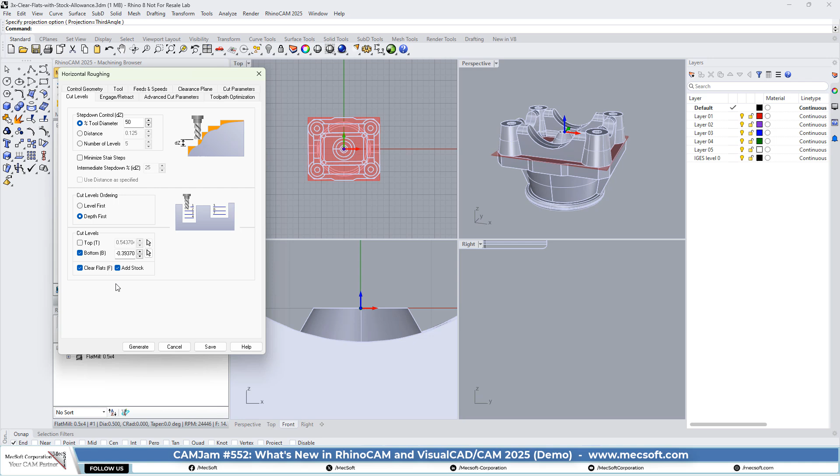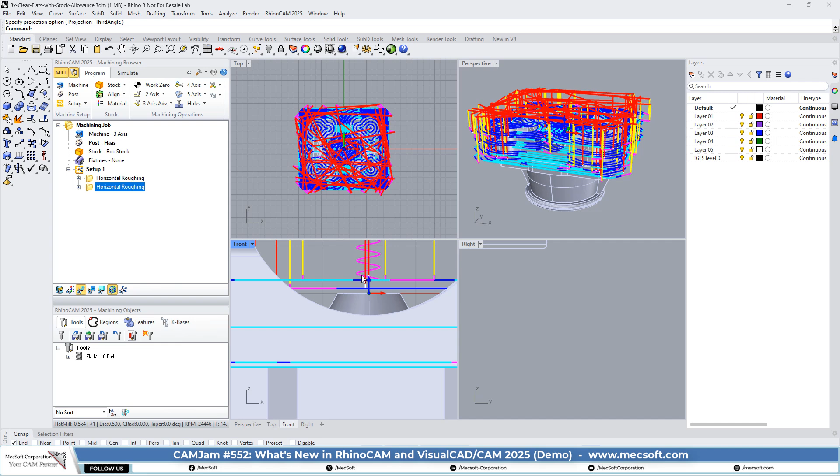So let's take a look at what that looks like. So now what you'll see is we don't put that flat additional planar motion on the part. We move up by the stock value, in this case 25 thousandths. So you'll see that there's 25 thousandths left on your part that you can come in and clear off the way you want to. And again, here it is, up 25 thousandths.

And if we look at a wireframe, you'll see that inside, I believe that bottom floor is right here as well. We backed off 25 thousandths.

So to reiterate, in 3-axis horizontal roughing, cut levels tab, clear flats, you also have this option now of adding stock. So if you don't want to clear your flats, but you want to cut the flats while leaving the stock amount, just check that box, regenerate your toolpath, and you'll be all set to go.

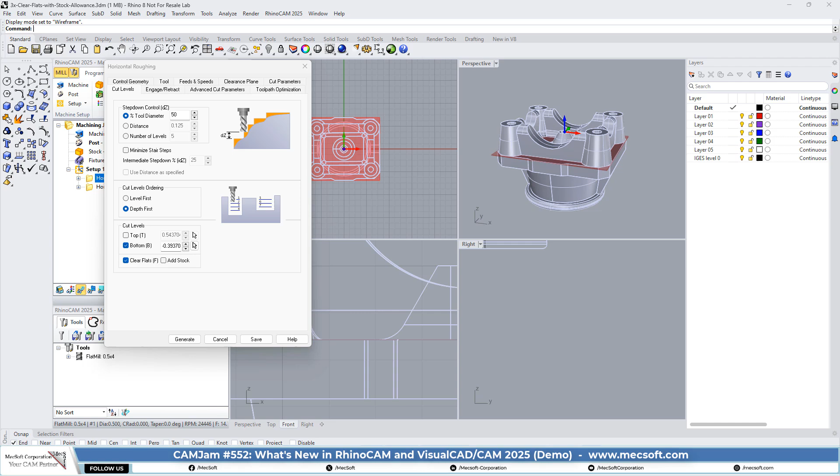Okay, so that's it for the major 3-axis enhancements. Let's take a look at a 5-axis enhancement. We'll go down here, go here, go over here. Now this is a big deal in 5-axis machining.

In a lot of cases in 5-axis, you're cutting complex geometry, and also you may be cutting edges off of a part. So you can think of if you have press punched a formed shell on a car body, just an example. You punch that car body, you have a blank, and you're punching the shape in the car body, but you need to trim out the edges of it. So you can use a 5-axis toolpath - just put that half-finished punched part on a fixture, and you can use this toolpath to go around and clean up those edges.

They use this a lot with robotics to cut and trim things in 5-axis. In this particular example, it's a straightforward 5-axis continuous toolpath.

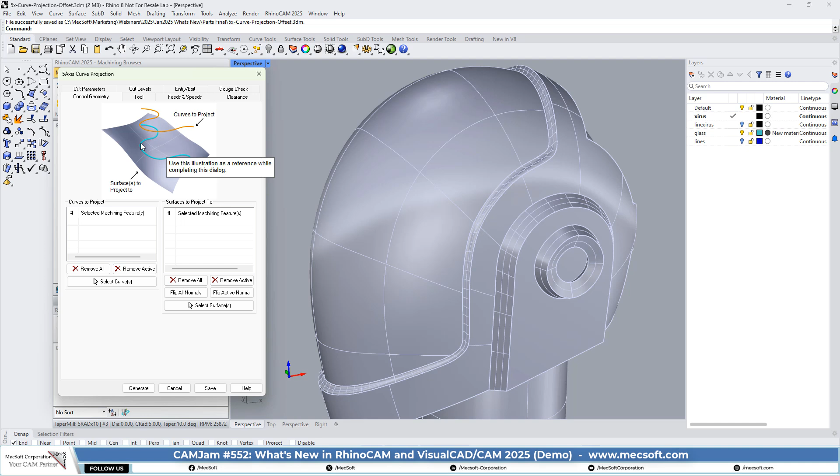In our 5-axis menu, it is the curve projection method. Curve projection is a go-to operation type for cleaning up areas around edges in 5-axis. What it's doing is taking a curve that you select and projecting it downward onto the part, cutting that curve in a 5-axis continuous motion.

In this particular part, what we want to do is clean up this edge, which goes all the way around the part. Let's take a look at this in a side view. You see that this edge we want to clear is pretty complex.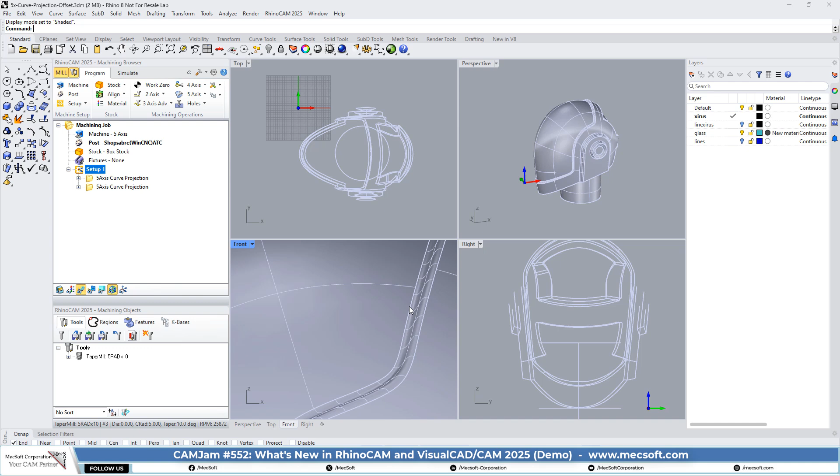So in 2024 and prior, on the 5-axis curve projection, you needed to create your curve at the location you want to project it. In cases like this, you may not want to use this edge and project it directly onto it, because it may ride up on this surface. So you may want to move it over and then project it down to clean up this edge, and that's exactly what we've allowed you to do now in the 5-axis curve projection method.

Let's look at this. What you're seeing here is the toolpath without using the enhancement. The enhancement can be referred to as an offset and then a projection. So without the offset, we're selecting that curve and it's attempting to project it down onto the surface. If you look at the dialog here, in 5-axis we have gouge checking.

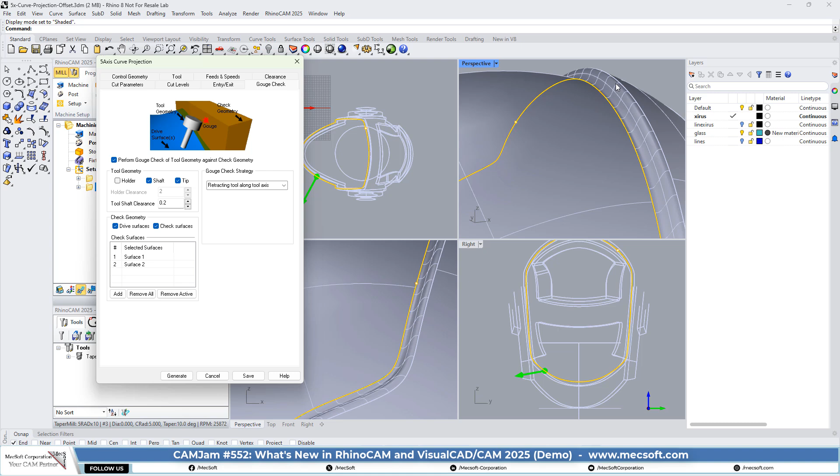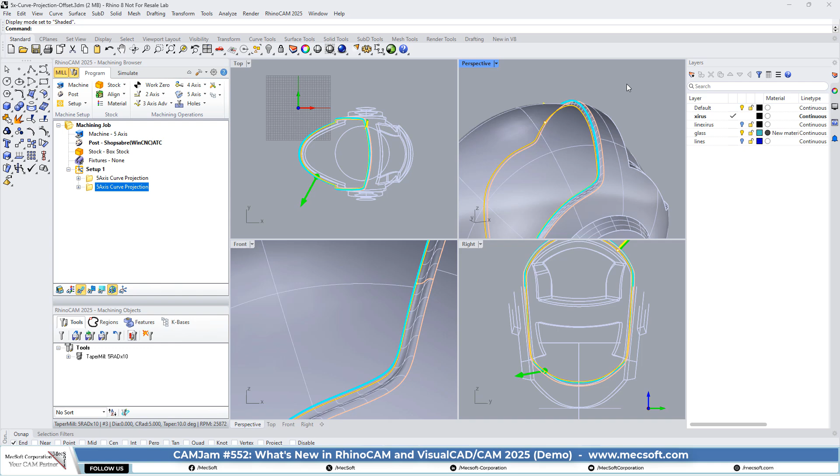We don't want that tool to gouge on this raised wall here, so we've assigned those surfaces as gouge check surfaces, meaning the tool will not violate those surfaces for any reason. But what that causes in version 2024 and prior is that the curve we're trying to project down to clean up that edge is riding up on this surface because it doesn't want to violate it. You'll see it's raised up in this area, and it might be closer in some other areas, like right in here. It's just not going to work.

So prior to 2025, you would have to go in, offset this edge, and create the curve you want to project. That's a big deal because this is a very complex curve. You can't just offset this curve inward and project it down because it's a complex 3-dimensional 5-axis curve, so it's not going to be the correct projection. So what have we done to help you do this?

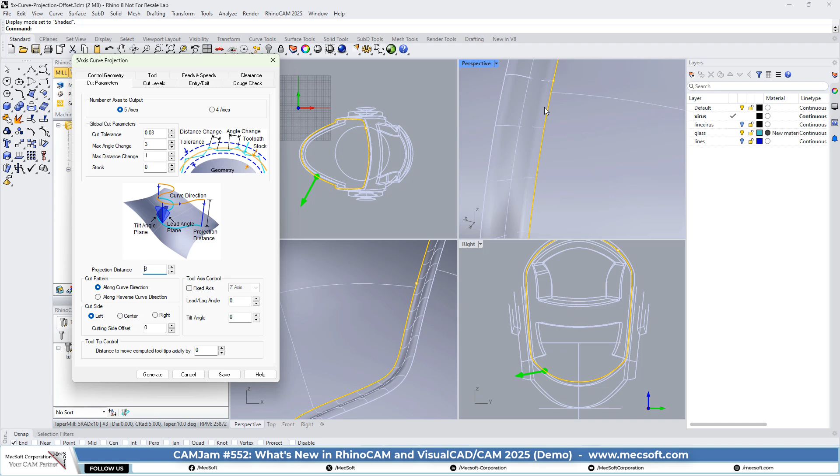Let's go back up in this dialog, the 2025 options. If you look at the cut parameters, we've added a cut side. We're still selecting that edge, but now we're telling it what side of this curve to cut on, and we can give it an offset distance. So we're telling it to cut on the left side of the curve, and in this case we're cutting at a 0 offset.

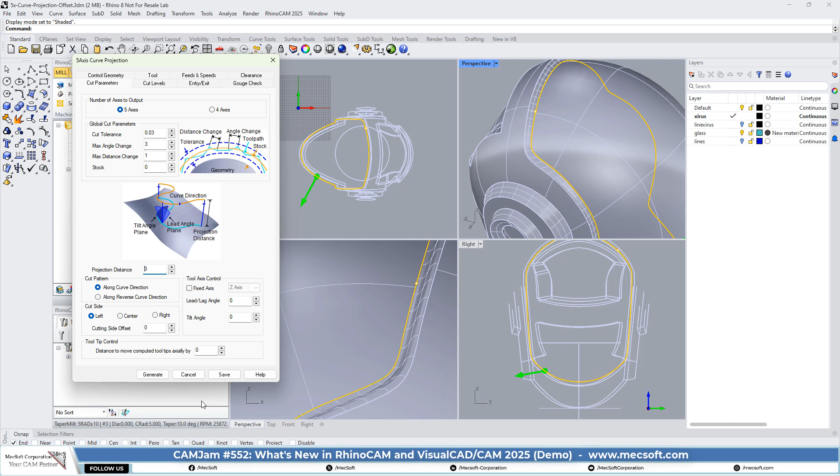Let's take a look, let's just cancel that a second. What happens is it offsets the tool and projects it down onto the surface in 5-axis mode. That is an exact offset and projection of this curve that you've selected. Now you can tighten this up or push it out, pull it in, however you want, but you see that it's not violating this edge whatsoever.

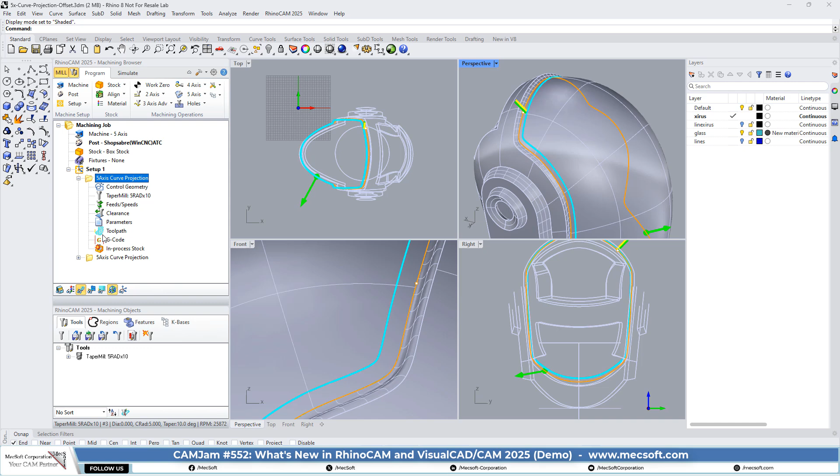So that is, if we look, can we look at the tool itself? Let's see here. Okay, so there's the tool if you look at it.

So what we're doing is cleaning up this edge. Of course, we offset it a little bit too far. You can tweak that forward, or play with it until you get that edge cut the way you want without violating this wall. So that's somewhat of a complicated way of explaining a really complex problem that we've solved in version 2025.

Okay, let's look at one more part. In this part, we're going to look at rigid tapping in hole making. This is our last part, so we should wrap this up pretty quickly. Let's go down here. So what we have is a basic 2-axis part, and we've got this hole pattern.

But what we want to do is tap these holes using a rigid tap method. In a rigid tap, rigid means that the tap tool and the collet on the tool are rigid — like one solid tool. Also, the rigid tap is a canned cycle, one of the cycles built into your machine controller. If your controller supports canned cycles, you can use these to do drilling, tapping, boring, etc.

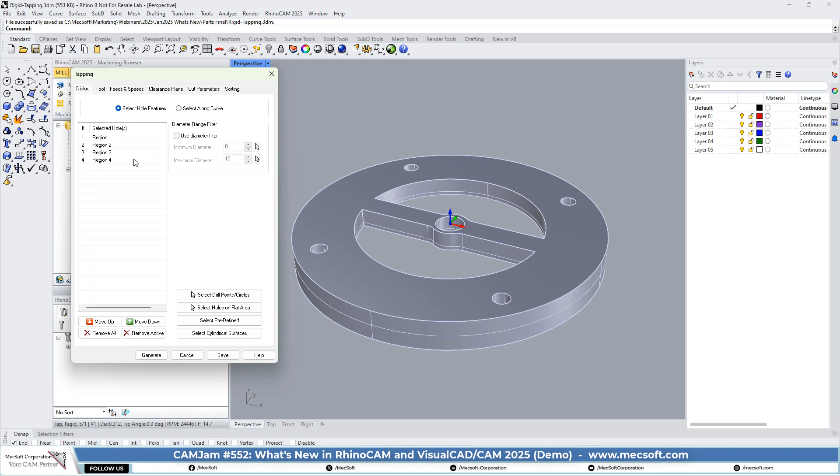We're using a rigid tap tool. Let's take a look at what that looks like. So this is our tap tool. The pitch is 0.041. And it can be a single thread tool or a multiple thread tool. I believe either way it should work fine.

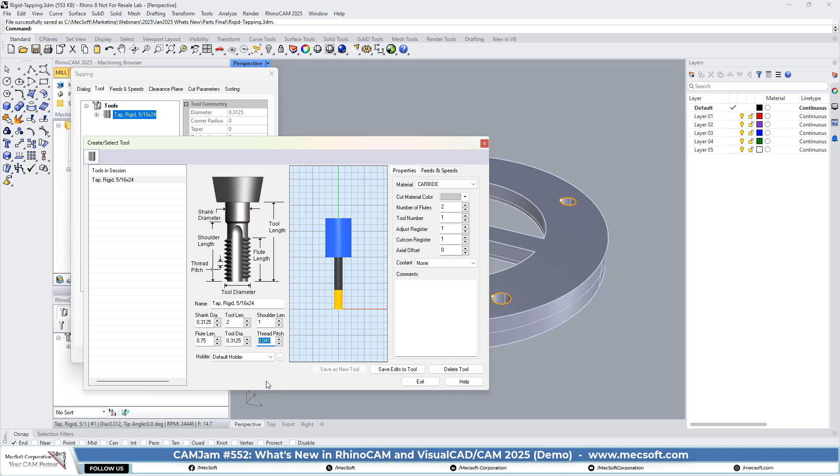So there's the rigid tap tool, and the difference here is on the cut parameters tab you'll now see that you have a rigid tap selection in the tapping types you can pick from. So we have a tap, a peck tap, a rigid tap, and then tap 1, 2, 3, 4, which are user defined cycles that you can define yourself. What we're talking about here is a rigid tap motion.

So we're going to pick rigid tapping. The depth is 1/4 inch. The location of cut geometry is at top — the curves are at the top of the hole. The dwell is turned off. For the tap direction, we're doing a right hand thread. We have an approach distance of 0.2, meaning the tapping tool comes down to 0.2 above the geometry, then starts tapping, and the feed rate starts going down on the z-axis to do your tap.

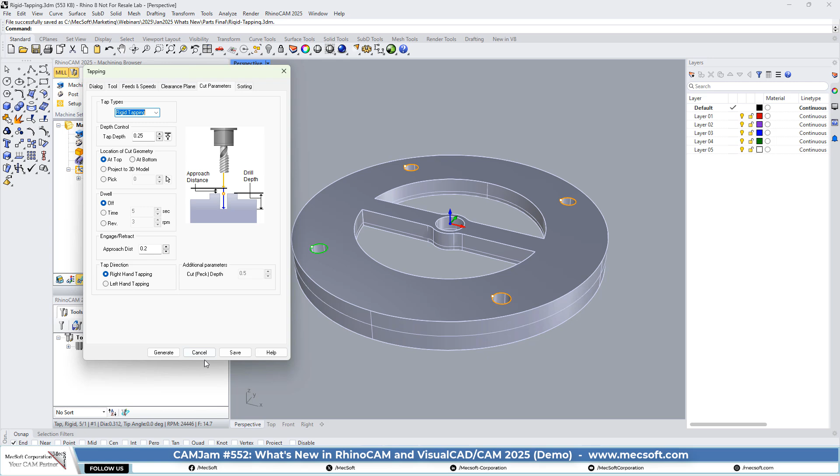Okay, let's cancel that out and take a look at what happens in the post. So we got Haas rigid tap, let's take a look at that. You'll see down here in the cycles section, these are all of your canned cycles. If your machine supports canned, as in C-A-N-N-E-D, canned cycles, then you have canned cycles.

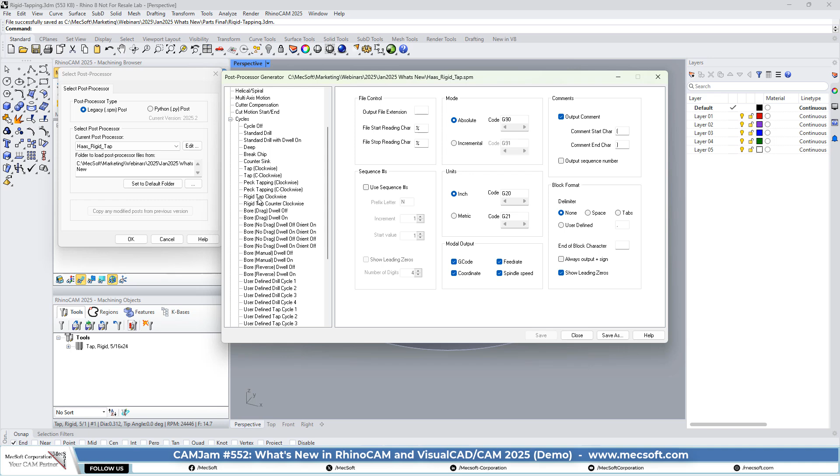If your controller supports canned cycles, you'll be able to take advantage of all these different operation types in hole making. So here we added a rigid tap motion, and we set up the cycle code here for a G84. All of this has been added to create the G84 line of code, the canned cycle code to post out to your router. If you don't see this automatically in your post, if you want it added, just contact us at support@mecsoft.com and we'll update the post for you.

Okay, and let's see, that looks good. So let's go ahead and close that and post this out. Let's cancel that, let's post.